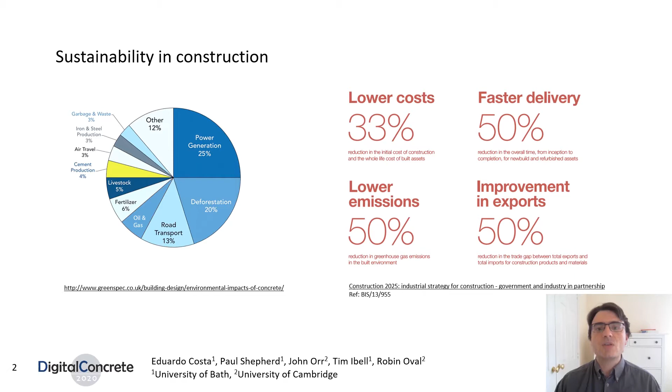In order to improve the sustainability of the construction sector, the UK government has set 4 goals to be achieved by 2025, which include a 50% reduction in greenhouse gas emissions in the built environment.

Following that lead, we are working on a research project titled Automating Concrete Construction, or ACORN for short, which aims at improving whole life sustainability and productivity in the building industry by defining a holistic approach to the manufacture, assembly, reuse, and deconstruction of concrete buildings.

One objective is to reduce the material of concrete structures with an embedded consideration of automation of construction. This research project represents a transitional pathway for low-carbon concrete design, paving the way towards carbon neutrality. Today we present some early results from the project.

In its quest to ensure that just enough material is used and no more, we are investigating ways of optimizing beams and slabs for off-site mass customization, towards reducing their embodied carbon, with a particular focus in the use of flexible formwork for concrete manufacturing. In particular, we present the development of a computational design tool with the intent of catalyzing the adoption of such an approach by the construction industry.

Our approach to reduce material and subsequently the embodied carbon of concrete structures is through promoting the use of non-prismatic concrete elements. Traditional methods for producing concrete elements use orthogonal rigid panel formwork, resulting in prismatic building elements.

Such is not because it is difficult to shape concrete to other forms since it begins life as a liquid, or because an element needs to be prismatic to support its load, but because a prismatic formwork is easier to build. It has been shown that up to 50% of the concrete in a typical beam is only there because of the prismatic formwork it was made in, and could be removed. For too long, the industry has used ease of construction as an excuse to waste material.

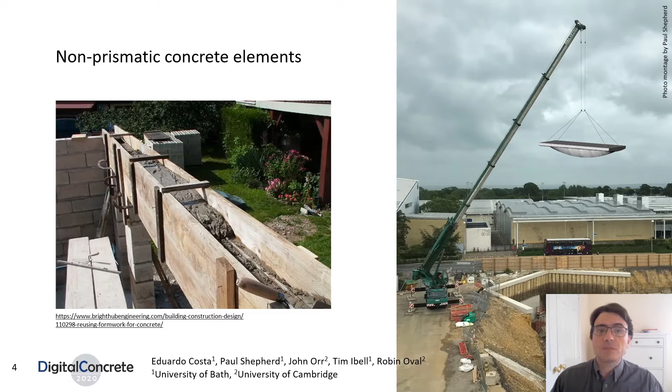Therefore, we are implementing a computational design tool to generate optimal forms for non-prismatic reinforced concrete elements that takes into account the constraints imposed by the fabrication process. The design of non-prismatic concrete elements will be governed by a design system that articulates 3 modules, namely generation, analysis, and optimization, and is informed by manufacturing constraints. This work precedes the fabrication of 1-to-1 scale physical test specimens.

Presently, the adopted optimization approach looks for designs that, while their performance satisfies their design requirements, use just enough material and no more. In case of beams, an element's performance is currently assessed in terms of serviceability, particularly in terms of deflection. The analyzed beam designs are provided by the generation module, which is developed towards flexibility by representing a wide spectrum of shapes and structural configurations. The paper focuses on the first 2 modules, generation and analysis, as applied to the design of non-prismatic beams.

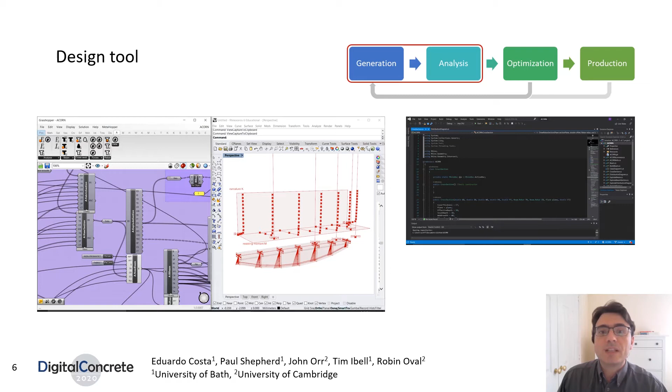The generation module is responsible for creating the shape of a reinforced concrete element through a parametric modeling approach, which enables effective production of design alternatives adapted to boundary conditions. Presently, 2 templates are implemented, capable of generating T-shaped beams and fabric form beams, which are defined by NURBS surfaces as well as by additional corresponding information.

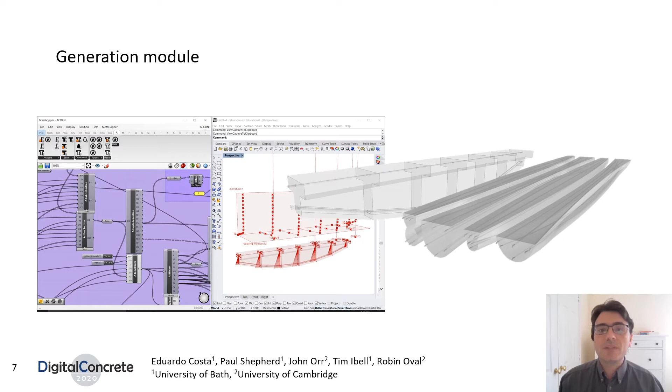T-shaped beams were selected as they are fairly common, typically studied in structural design textbooks. On the other hand, the choice for fabric form beams derives from existing expertise on the subject within the project's team. Note that standard rectangular beams can also be generated using the T-beam template.

We'll use the T-shaped beams to illustrate our approach to the generation and representation of non-prismatic beams. Complying with the principle that every cross-section in a beam remains plane after deformation, the shape of a non-prismatic reinforced concrete beam is described in ACORN by a number of cross-sections. Given the required parameters associated to cross-sections, which can vary along its length, the corresponding T-shaped cross-sections are determined, which in turn are used to generate the beam's shape.

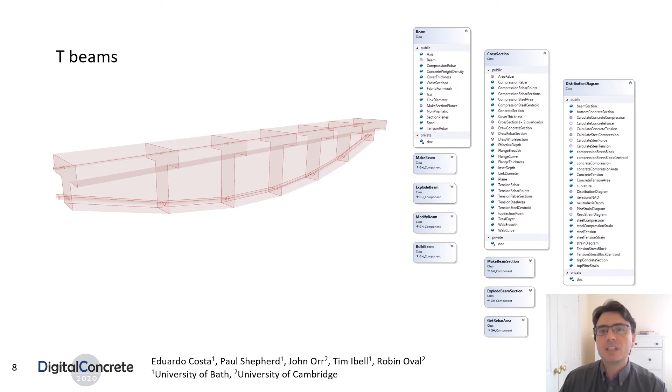Additional parameters pertain to the beam itself and remain constant, such as its span, material properties, and number, diameter, and type of reinforcement bars used. On the other hand, generating the shape of a fabric-formed beam implies simulating the behavior of concrete poured inside fabric formwork, for which we opted for a numerical approach.

An iterative method was used to form-find the section shape corresponding to a variation of the elastic curve, which takes into account the effects of both gravity and the hydrostatic pressure of the poured concrete. The form-finding procedure was extended to determine the shape of fabric formwork when restrained with internal ties, expanding the design space of the beam's shape.

For preliminary validation, the algorithm was used to match the shape of a previously fabricated 60 cm long fabric-formed beam. The generated model was then compared with the mesh that resulted from 3D scanning the physical model of the existing beam.

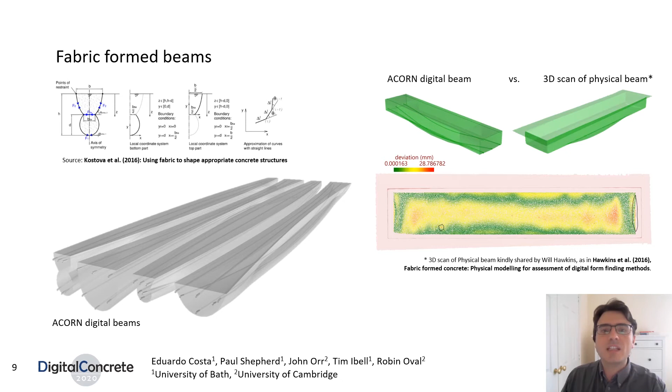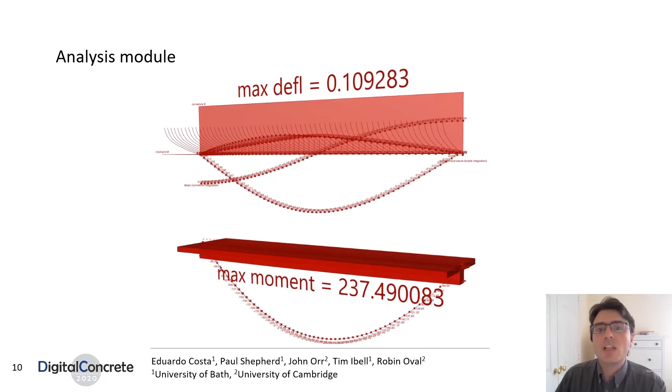Looking now at the analysis module, its main purpose is to determine the performance of a given beam design. Deflection was selected as a first indicator for performance, since in the case of buildings, serviceability is often the limiting factor over strength. In our analysis module, deflection is calculated numerically through the method of integration of curvatures. The main advantage of the implemented module over existing plug-in solutions is its capability to analyze non-prismatic geometry, as well as take reinforcement steel into account.

The estimation procedure consists of the following. We begin by dividing a beam into a number of equally spaced planar sections. Since we are representing the shape of a non-prismatic beam by a set of cross-sections, those cross-sections will be used in the process. For each of those cross-sections, we generate a set of strain diagrams within an increasing range of strain values at the beam's topmost fiber between 0 and the ultimate strain for concrete.

For each strain value and corresponding diagram, we determine the neutral axis iteratively by testing hypothetical strain diagrams and balancing compression and tension forces both in the concrete and reinforcement steel. After determining the neutral axis, we are able to calculate the resisting moment for that strain value, currently around the centroid of the tension rebar's cross-section.

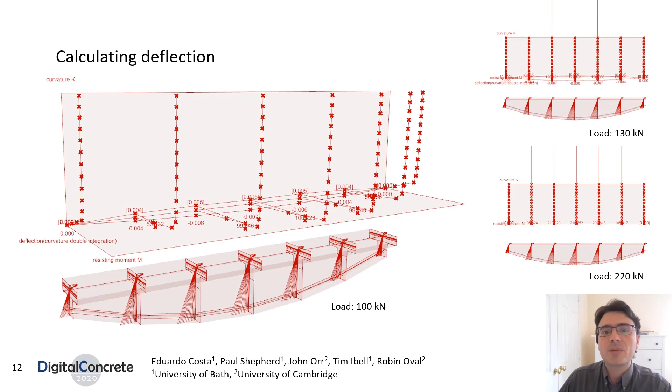Now, for each of the beam's cross-sections, we are able to plot a graph of resisting moments against curvatures, which are calculated from the slope of the strain diagrams. Then we determine the curvature at the section point from bending moment. Finally, we integrate the beam's curvature over the beam's length to determine the slope, and integrate slope over the beam's length to determine deflection. In addition to calculating deflection, the tool provides information about strength by identifying failure at individual sections.

The analysis module was validated by comparing its results with published experimental data consisting of a series of short-term load tests on reinforced concrete beams. Considering these as benchmark prismatic beams, one of them was replicated using the generation module and then run through the analysis module, generating the corresponding moment curvature and deflection plots.

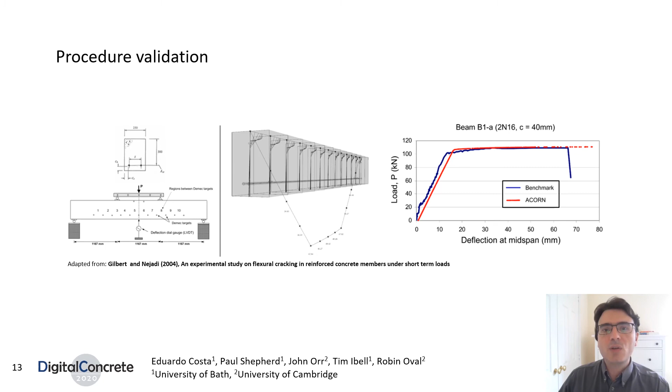A load deflection plot was used to compare the results with the benchmark beams. Comparing both load deflection plots, we considered the analysis module as valid, particularly considering that the benchmark plot resulted from a physical test and the ACORN plot results from a digitally simulated beam.

In summary, by facilitating the design of non-prismatic reinforced concrete elements, the ACORN design tool aims at rendering such an approach available to current design practices, enabling structural designers to design more sustainable concrete elements with confidence, rigor, and speed, and therefore mitigating the obstacles that prevent them from using just enough material.

Following the development of the generation and analysis modules, an exploration of the optimization module will begin by experimenting with existing plugins for Grasshopper. As the project advances beyond beams, non-prismatic concrete slabs are being addressed, particularly looking at thin shells due to their structural efficiency and reduced material.